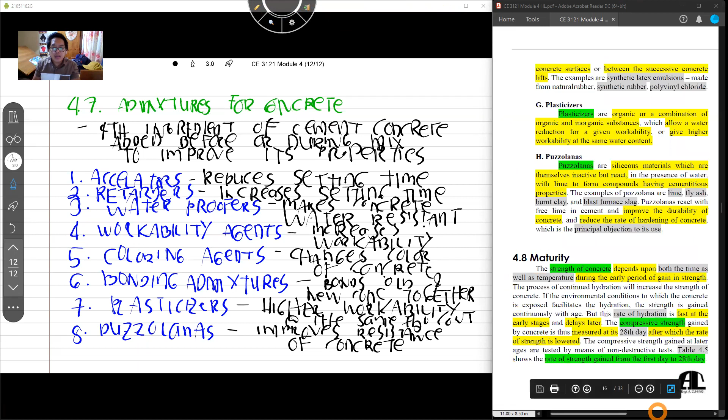So technically, our notation is percentage F prime C, because F prime C is our notation for the strength, compressive strength of concrete. So we have a formula, wherein A and B are defined - the values of A and B are constants. Then M sub N, this is the maturity of concrete at a certain percentage. Then we have the values of coefficients A and B in the formula for percentage of strength at maturity.

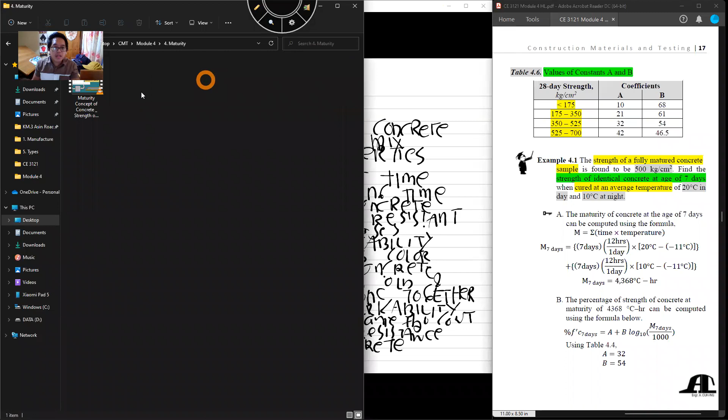So for you to further understand, we have a video discussion about that. Okay, so this is the maturity class. Let's watch it again before we summarize, and then we'll jump to the example.

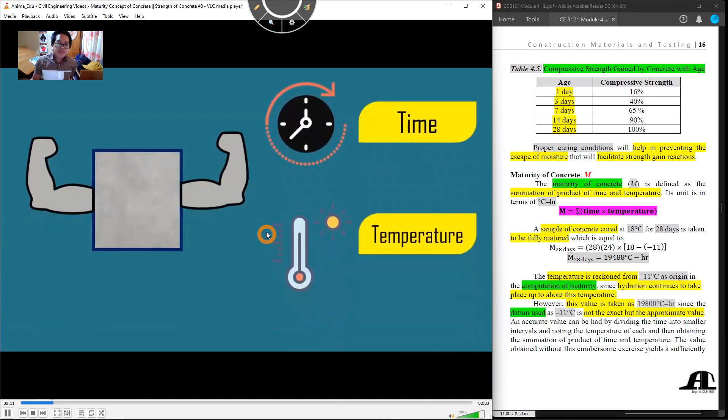Maturity concept of concrete. The strength of concrete depends upon both the time as well as temperature during the early period of gain in strength. The maturity of concrete is defined as the summation of the product of time and temperature. So again, class, that's our formula. Its units are degree Celsius hour or degree Celsius days.

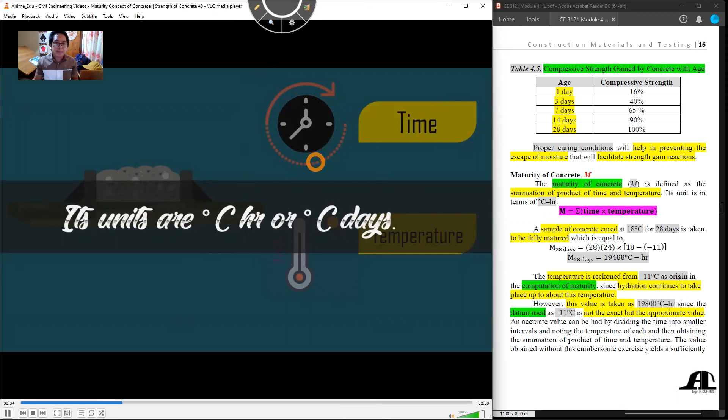Let's consider a sample of concrete cured at 18 degrees Celsius for 28 days whose maturity is calculated as this. So this is the explanation, class, of the sample computation.

In general, the hydration of concrete takes place even at the temperature of minus 11 degrees Celsius. So again, class, this is our reference in terms of temperature. That's our datum, our reference point. So always, class, whatever the given temperature is, we need to get the gap from negative 11 degrees Celsius.

That's why we subtract it, class. So instead of 0, our reference point, class, is negative 11 degrees Celsius. So from negative 11 degrees Celsius, class, to our respective temperature, that's our temperature here. Okay, thus it is taken as the origin in the computation of maturity.

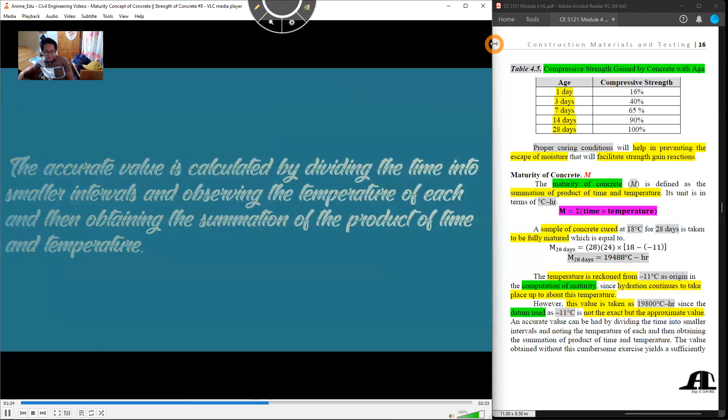The value is taken as approximately 19800 degrees Celsius hour. This is an approximate value. The accurate value is calculated by dividing the time into smaller intervals and observing the temperature of each, then obtaining the summation of the product of time and temperature. Besides, the value obtained with the help of the approximate value also yields a sufficiently accurate value and is widely accepted.

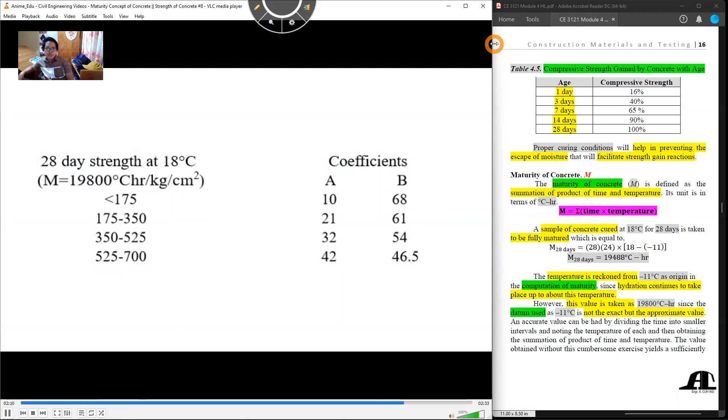The relationship between maturity and strength of concrete is shown. The maturity concept is very useful for estimating the strength of concrete at any other maturity as a percentage of the strength of concrete of known maturity by using the formula. The value of constants A and B are given by researcher Plowman, which is shown on the screen. With the help of these values, the strength of concrete at any maturity age can be calculated.

Thank you for watching. Stay tuned. The best is yet to come.

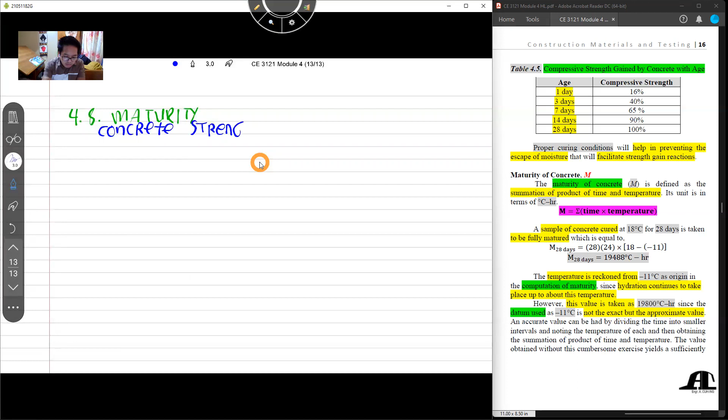Okay, so again, class, here we are at 4.8. Okay, so supposedly, class, this is the maturity. Okay, so first up, class, let's discuss the concrete strength gained with age. Okay, so we get an idea, class.

Okay, so yeah, so supposedly, class, for a certain age, let's do this in terms of days. Okay, at a certain age, class, we have the percentage of our compressive strength. Okay, so namely, class, we have 1 day, then 3, 7, 14, then 28.

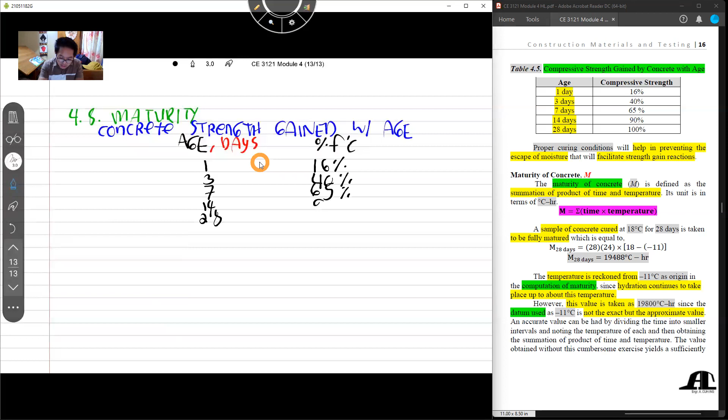Okay, so what's our percentage, class? For 1 day, class, we get 16% of compressive strength. For 3 days, class, we get 40%. Then 7 days, class, we get 65%. Okay, after 14 days, class, we're at about 90 already. Then, 28 days, it's already very mature. So we can say, class, safe to say, it has already reached 100%. Okay, so that's our gist, class, in terms of strength gain at maturity.

Okay, this time, class, we talk about maturity. So again, class, we have the formula for maturity. Okay, our notation, class, for maturity is M. So the formula, class, for maturity is M equals the summation, class, of time times the temperature. Okay, and our unit here, class, is again, for hour, class, degrees Celsius, hour.

Let's not use days, class, so we stay consistent. Okay, then our origin, class, in terms of temperature. Okay, so, yeah.

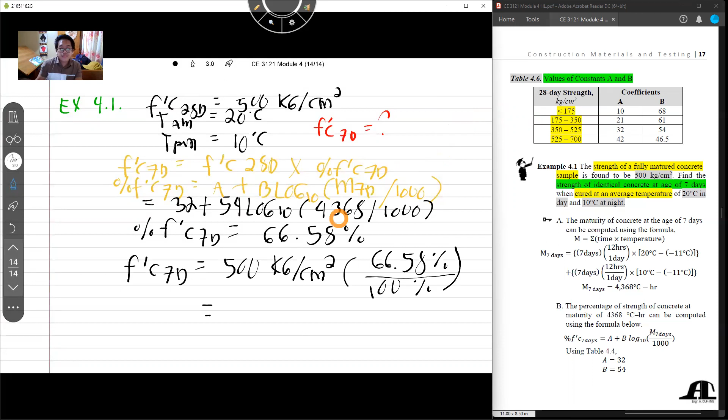Ang sagot na natin dito class, kung titignan nyo, sige i-calculate na rin natin. 500 times 0.6658 is equal to, meron tayong 332.9. Ang unit natin class, kilogram per centimeter squared. Ito na class yung strength ng concrete at 7 days.

Ayan, okay, ito na yung ating final answer, class. I-compare nyo, class. Tama yung sagot natin. Okay, ganun lang kadali, class.

Again, wag nyo lang kakalimutan, class, yung datum natin, yung origin natin in terms of temperature, dapat negative 11 degrees, as explained from the video, tsaka dun sa module natin. Okay, so tuloy-tuloy lang tayo class.

So moving on, meron tayong tinatawag, class, na design mix, mix design. Pinaka-formal definition natin, class, ng mix design is the process of selecting suitable ingredients of concrete and determining the relative quantities with the objective of producing an economically as possible concrete of certain minimum properties.

Okay, so ano yung properties? Workability, strength, and durability. Bale, in simple words class, ang consideration natin in the design mix is yung cost tsaka yung minimum required properties natin.

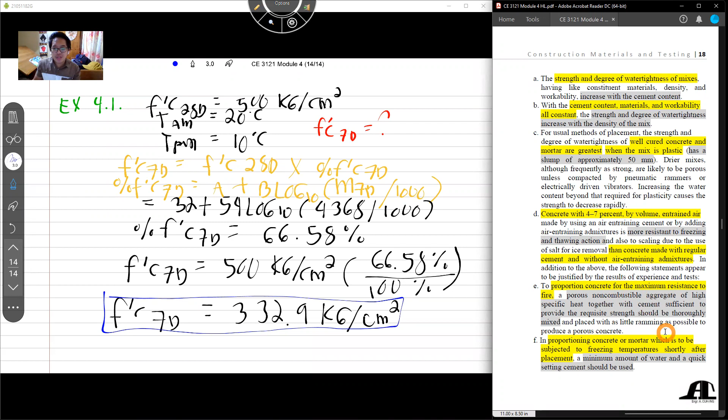Minimum amount of water and a quick setting cement should be used. Lastly, concrete for road construction should be made from a carefully graded, hard, tough aggregate bound together with a small proportion of rich mortar.

Let's simplify this. Read it on your own. So technically, we talked about mix design 4.9.

Specifically, mix design. In terms of mix design, this is where you create your own mix to attain certain properties of the concrete. Let's define it: this is the process of selecting suitable ingredients of concrete with certain properties.

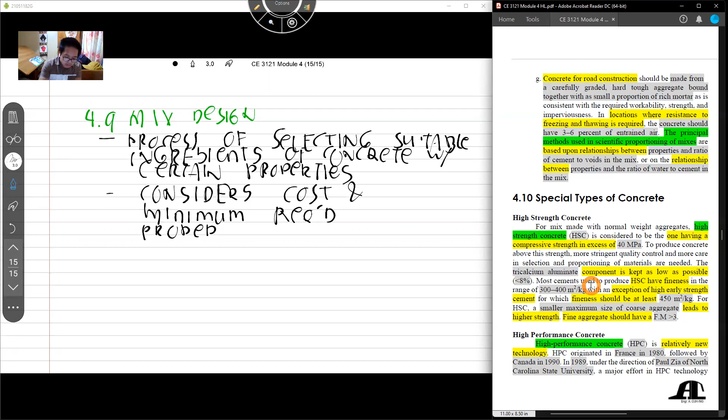So again, we have to consider the cost as our main consideration in selecting the ingredients. Then the minimum required properties of the concrete.

Let's continue. So we have certain special types of concrete, namely: high-strength concrete, high-performance concrete, and what we call self-compacting concrete.

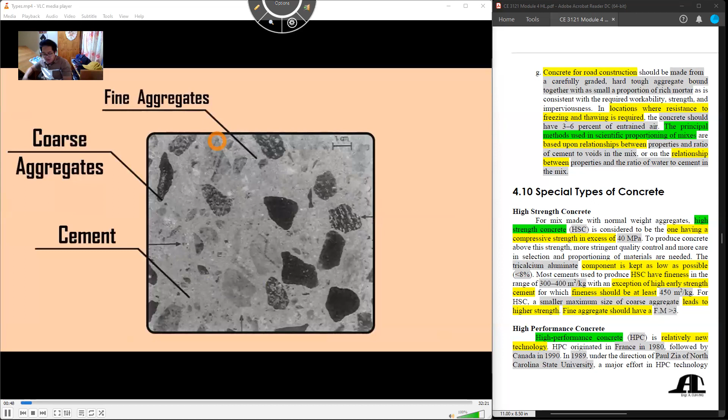Concrete is a composite material composed of binder, that is cement or lime, fine aggregates, that is sand, and coarse aggregates mixed with water which hardens with time. The fine aggregates fill the voids of coarse aggregates, and the voids of the fine aggregates are filled with the binder. This binder reacts with water and binds the aggregate, forming a complex matrix. This composite form is called concrete. To know how to manufacture concrete, watch the videos in this playlist. Link is available in the description.

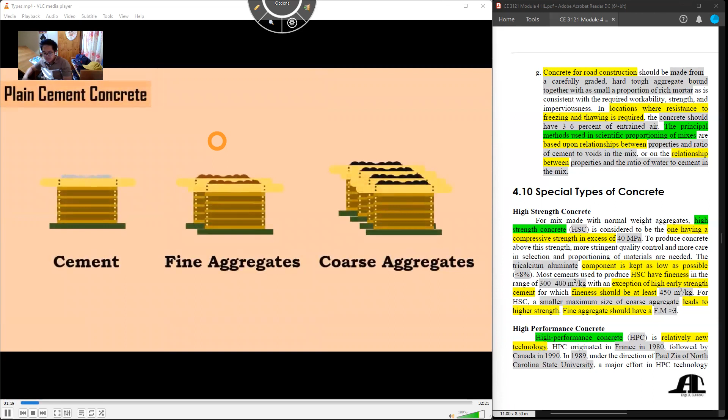There are many types of concrete available, which we are going to see in our upcoming videos. First, let's start with plain cement concrete. This is the simplest form of concrete, made only by mixing basic ingredients. These types of concrete are mainly used in the construction of pavements and buildings, especially in areas where there is a requirement for low tensile strength.

It is also used as bed concrete below the footings and walls, and sill concrete below the window and ventilator. We will see the other types of concrete one by one in upcoming videos.

Reinforced cement concrete: the hardened concrete is generally high in compressive strength, but its tensile strength is very low, generally approximately 1/10 of its compressive strength. We can say concrete is strong in compression and weak in tension. To strengthen the concrete section in tension, reinforcement steel is embedded into the concrete. This composite section is called reinforced cement concrete. The reinforcing steel also imparts ductility to the concrete, which is primarily brittle.

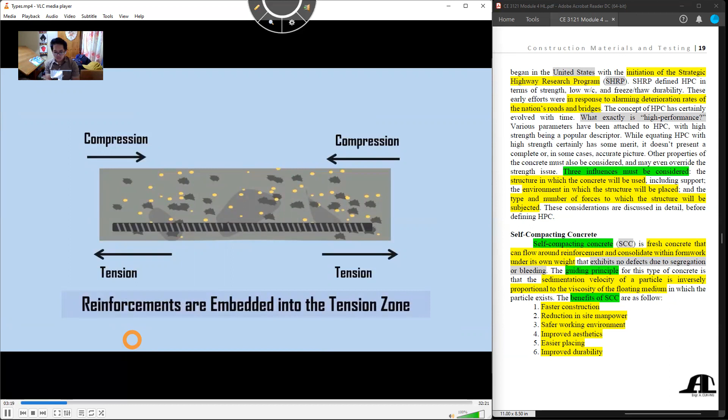The reinforcements are embedded into the tension zone of the section to counteract the tension force acting in the section. Most of the modern-day buildings are constructed using this type of concrete. In case of compression members, reinforcing steel also acts as a supplement in bearing compressive forces. In recent times, polymers are also widely used for making reinforced concrete.

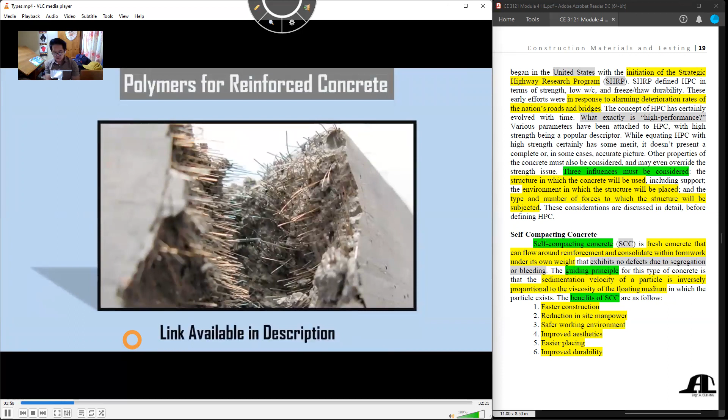The usage of reinforcements, such as size and number of reinforcement steel, should be designed based on various factors, and it should also be confined to a specific code of practice. Improper size and number of reinforcements may result in failure of the structures.

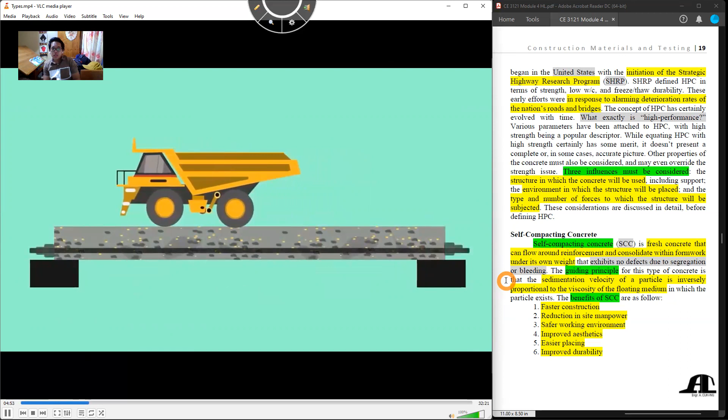In pre-stressing, the rods or tendons are stretched along the axis and cement is poured. Later, when the tendons are released, the compression generated at the bottom tries to counterbalance the compression due to loading at the top part of the beam.

The principle behind pre-stressed concrete is that compressive stresses are induced by the high-strength steel tendons in a concrete member before loads are applied. This will balance the stresses imposed in the member during service.

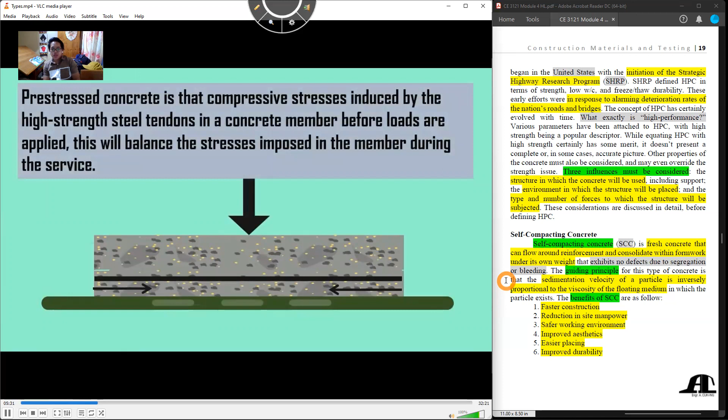Pre-stressed concrete can be used for the construction of roofs, floors, walls, and bridges with longer unsupported spans. Pre-stressing is generally done by two methods: pre-tensioned concrete and post-tensioned concrete.

Post-tensioned concrete. In post-tensioned concrete, the tendons are tensioned after the concrete is poured. Initially, the concrete is cast around the sheathing. The ducts are formed in concrete in which tendons are placed. After the concrete is hardened, the tendons are tensioned by hydraulic jacks and anchored.

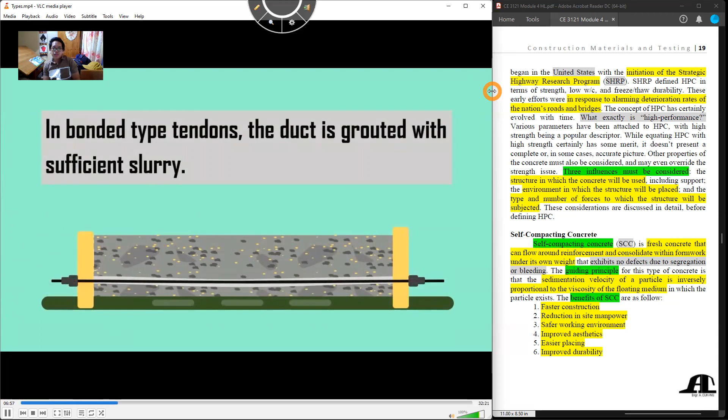In case of bonded type tendons, the duct is grouted with sufficient slurry. In the unbonded type of tendons, grouting is not necessary. We will learn about this later.

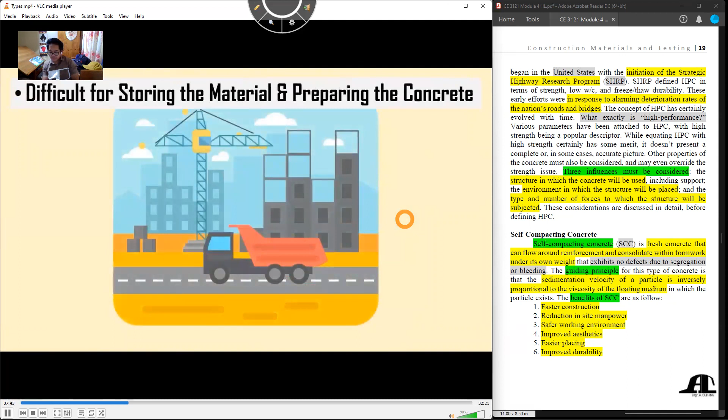In certain places where there is limited availability of space in the construction site, it is difficult for storing the material and preparing the concrete. In such cases, concrete is cast at factories and brought to the construction site and assembled together.

In general, precast concrete is a product produced by casting concrete in a reusable mold or form, which is then cured in a controlled environment, and then transported to the construction site and assembled in the required place.

These precast concrete members are cast either as plain concrete, reinforced concrete, or pre-stressed concrete. This is a far faster, safer and more affordable way of construction than standard concrete, which is poured directly at the construction site. Precast concrete allows efficient, economical construction in all weather conditions.

Precast concrete is being used in a wide range of fields like building units, landscaping products, sanitary and stormwater products, paving units, traffic barriers, and so on. Most of the bridge components are prepared using the precast technique. Other common examples of precast concrete are concrete blocks, steps of the staircase, precast walls and poles, concrete lintels, railway sleepers, and many other elements.

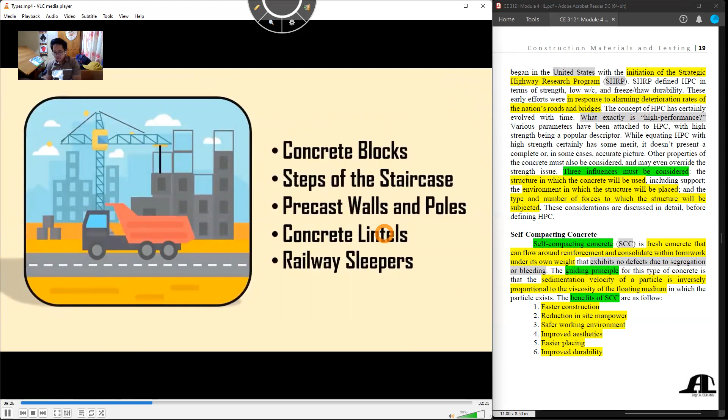The main disadvantage is it requires high-skilled laborers for installation of precast products. Proper connections must be made between each precast product, or else load distribution may not be uniform and sections may even fail.

Lightweight concrete is commonly used in the construction industry where it is important to reduce the density of the concrete. Ordinary concrete is quite heavy and its density is about 2,300 kg per cubic meter, whereas lightweight concrete has a density less than 1,840 kg per cubic meter.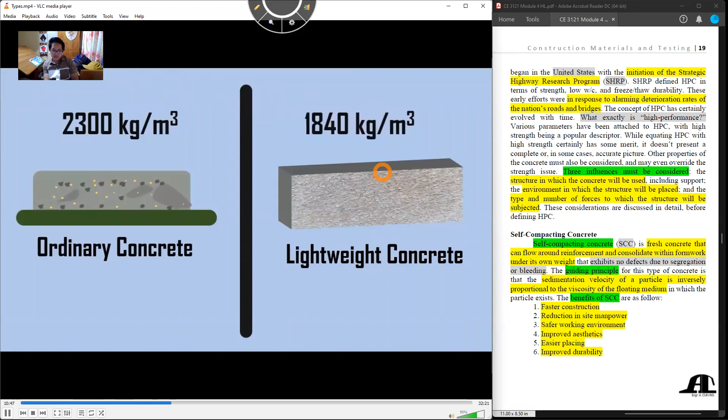Lightweight concrete is made by replacing some or all of the normal weight aggregate with lightweight aggregate. Often the coarse fraction is replaced with lightweight aggregate and the fines are normal weight sand. This lightweight concrete not only results in reducing dead weights on the structure but also has better insulation against heat and sound.

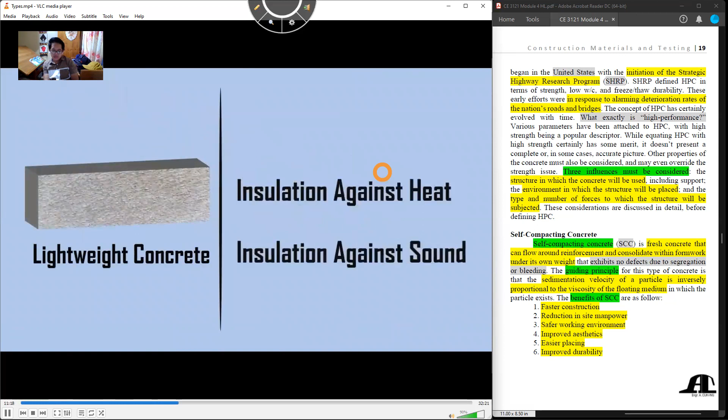However, the strength of the concrete is reduced. The most common uses for lightweight concrete are floor, roof and bridge decks. Others include pavement systems, masonry blocks and offshore oil structures. Lightweight concretes can either be lightweight aggregate concrete, foamed concrete, or autoclaved aerated concrete.

Lightweight aggregate concrete. This type of concrete can be produced by using a porous lightweight aggregate of low apparent specific gravity. Examples of lightweight aggregates are pumice, perlite, and scoria.

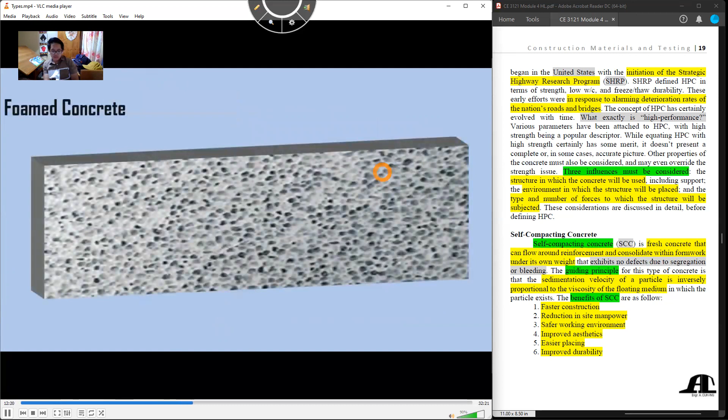Foamed concrete. This type of concrete is formed by introducing large voids within the concrete. Foamed concrete is a highly workable, low-density material which can incorporate up to 50% entrained air.

Lightweight structural concrete. Lightweight concretes can also be used for structural applications, with strengths equivalent to normal weight concrete. These are generally made with expanded shale, clay, slates, slag, and fly ash. The minimum compressive strength would be 17.24 Newton per millimeter square.

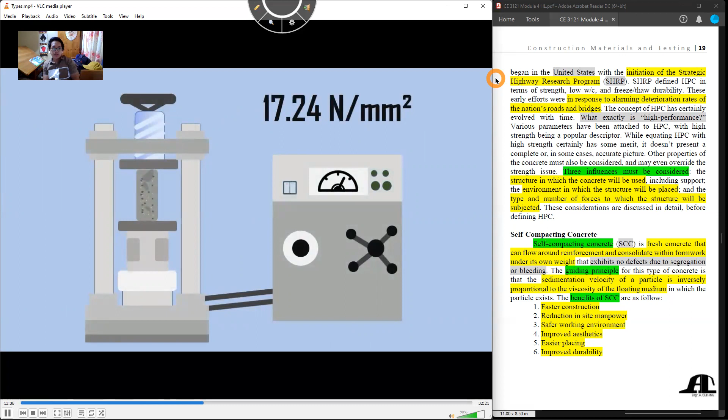Ready mix. So the next type of concrete class is ready-mix concrete, which we discussed earlier. Okay? Concrete.

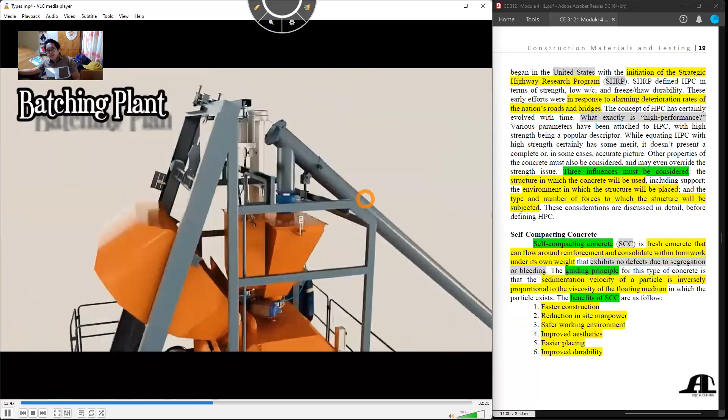Ready-mix concrete, that is RMC, is a type of concrete which is manufactured in factories, called batching plants, based on the engineered mix design. The mixed concrete is brought to the construction site by truck mixers or transit mixers.

The transit mixer is of two types. One type is the concrete made dry at the batching plant, loaded into agitated truck mixers, and water added during transportation.

In the other type, mixed wet concrete is made at the batching plant, discharged into the agitated truck mixers, and transported to the site. The drum in the truck is made to rotate till the concrete is placed, in order to keep the concrete in a plastic state.

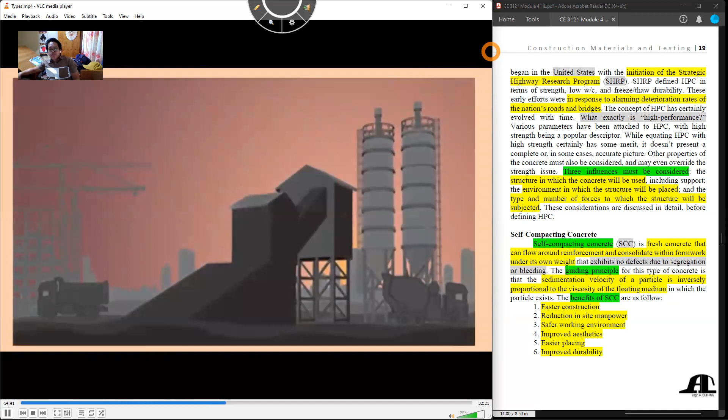We will see about the manufacturing process involved in ready-mix concrete later.

It allows speedy construction through programmed delivery at site, mechanized operation with acceptable economy. Usage of RMC reduces the labor cost and site supervising cost.

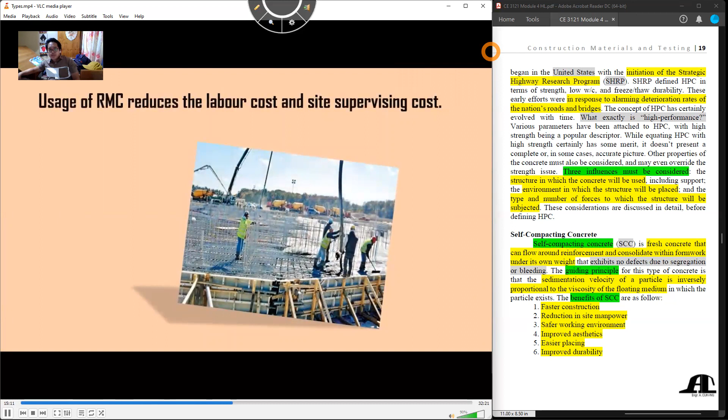The consistency in the quality of concrete is maintained through accurate and computerized control of cement, aggregates, and water as per mix designs. Usage of RMC also reduces the wastage of raw materials during storage.

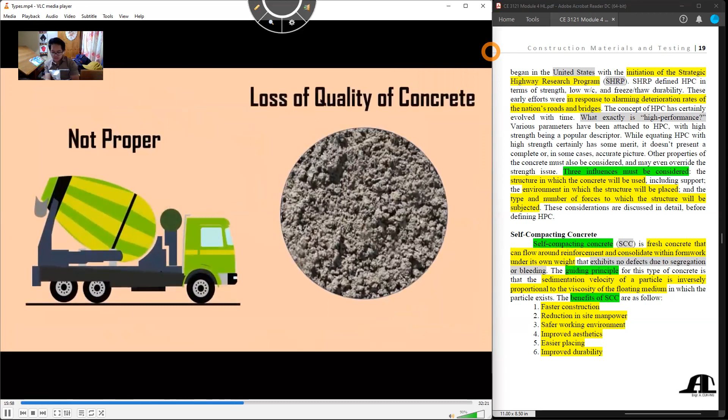The main disadvantages of RMC are that it requires special formwork arrangements since the movement of concrete through pumps can cause vibrations. And if the transit mixer is not in proper condition, there is a chance of loss of quality of concrete. In recent times, for large construction works, a small batching plant is set near the construction site where transit mixers may not be required.

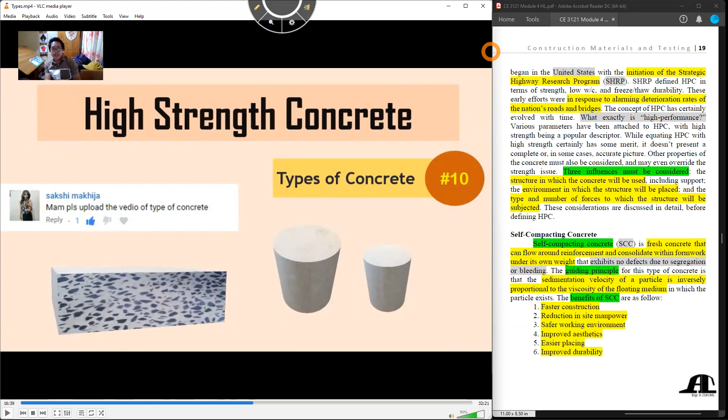High strength concrete. So now we move on to high strength concrete. Okay? So continuing the video.

High strength concrete is a type of concrete which has compressive strength of 40 MPa or greater. The compressive strength is generally measured on 150 by 300 mm or 100 by 200 mm test cylinders, generally at specific ages depending upon the application.

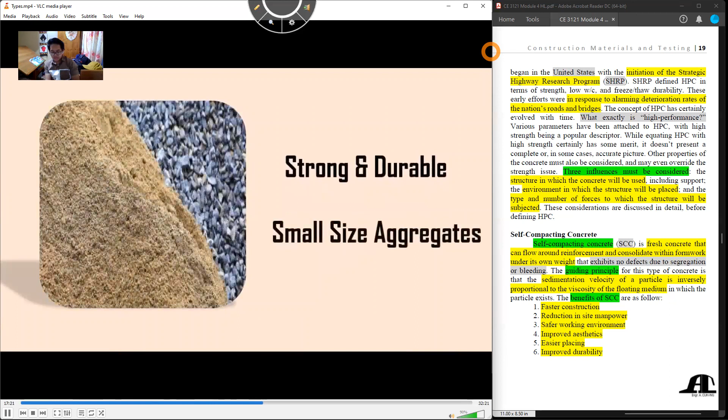Some of the basic concepts in preparing high strength concrete are: aggregates used must be strong and durable. Generally, small size aggregates are used for making high strength concrete. High strength concrete generally uses a low water cement ratio, which ranges from 0.23 to 0.35.

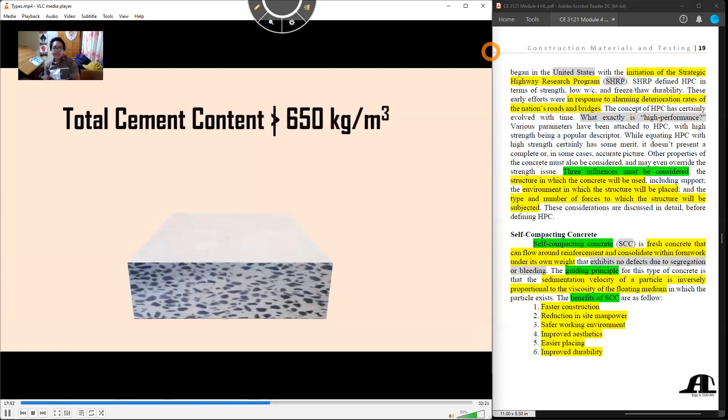Thus, superplasticizers are added to obtain the desired workability. The total cement content for this type of concrete should not be more than 650 kilograms per meter cube, as high cement content results in cracking due to hydration.

Sometimes, to obtain the desired strength, cement is mixed with supplementary materials like fly ash, ground granulated blast furnace slag, natural pozzolanic materials, etc. In addition, the components of the design mix like mix proportioning, the shape of aggregates, supplementary cementitious materials, and superplasticizers should be given special care while designing.

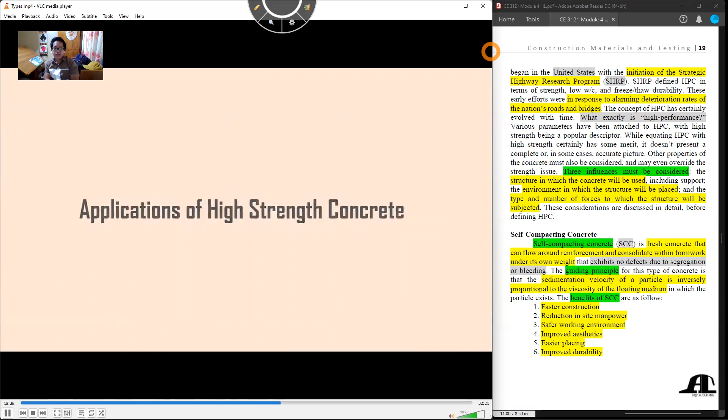The most common applications are to put the concrete into service at a much earlier age, for example opening the pavement at 3 days; to build high-rise buildings by reducing column sizes and increasing available space; and to build the superstructures of long-span bridges and enhance the durability of bridge decks.

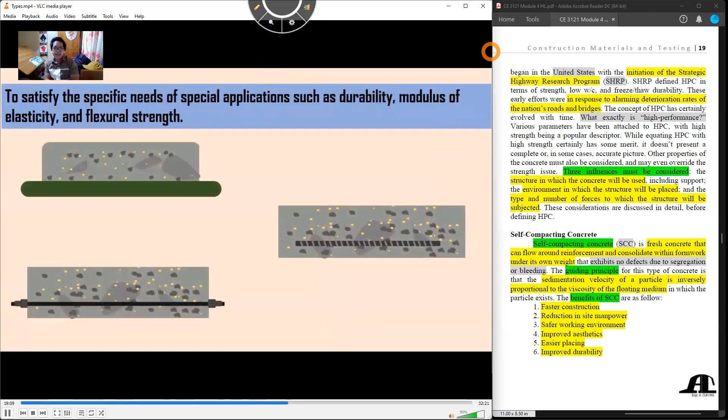To satisfy the specific needs of special applications such as durability, modulus of elasticity, and flexural strength. Some areas of use are dams, grandstand roofs, marine foundations, parking garages, and heavy-duty industrial floors.

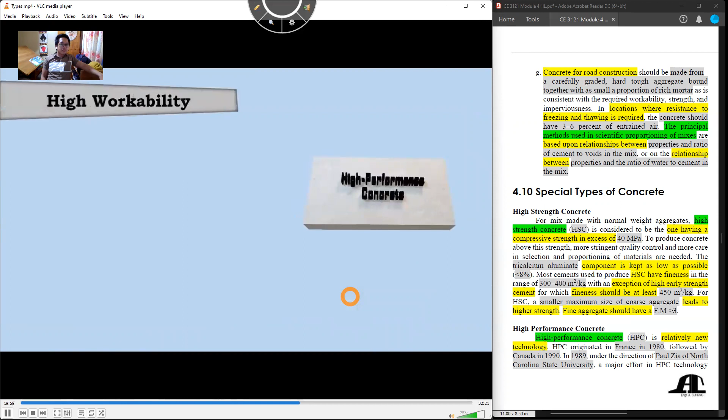High performance concrete is a type of concrete which possesses high workability, high strength, high modulus of elasticity, high density, high dimensional stability, low permeability, and resistance to chemical attack.

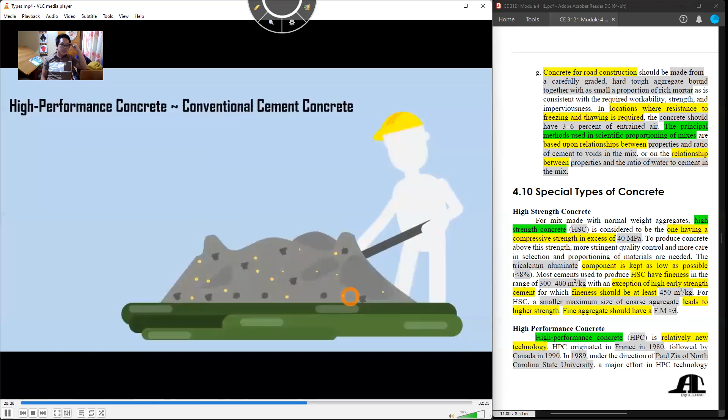High performance concrete is also a high strength concrete, but it has a few more attributes as mentioned already. It is made with materials similar to conventional cement concrete, but special care is taken for selection of materials and mix design. In addition, admixtures are added based on the purpose of the concrete to be used.

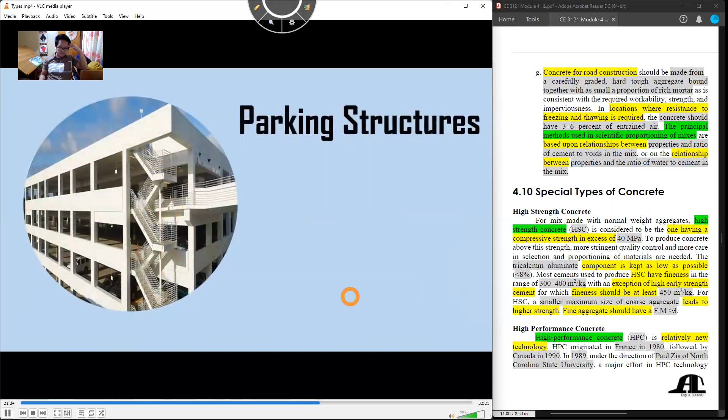High performance concrete still requires good construction practice and good curing to deliver high performance. The initial cost of this type of concrete is higher than normal concrete. However, maintenance cost is reduced comparatively, as high performance concrete suffers less damage.

So next up, class, that's it. This is the third one in our module, the self-consolidated or self-compacting concrete.

Self-consolidated concrete is also known as self-compacting concrete. It is a highly flowable, non-segregating concrete that spreads and fills in the formwork without any mechanical vibration. The importance of self-compacting concrete is that it maintains all concrete's durability and characteristics, meeting expected performance requirements.

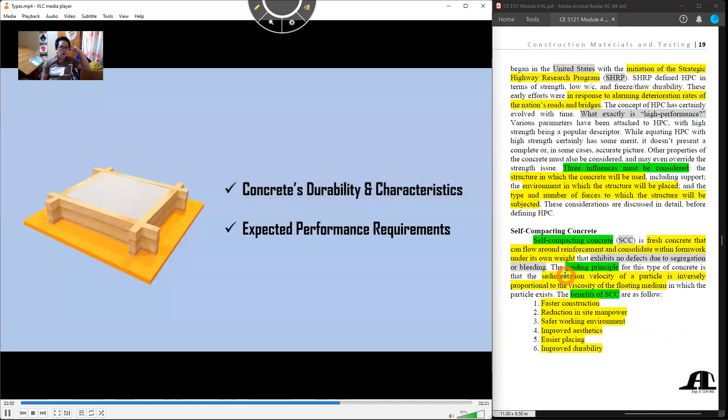The spread of self-compacting concrete in a flow table test ranges from 455 mm to 810 mm. The two main important properties of self-compacting concrete are flowability and stability. Flowability is attained by using high-range water-reducing admixtures, not by adding extra water.

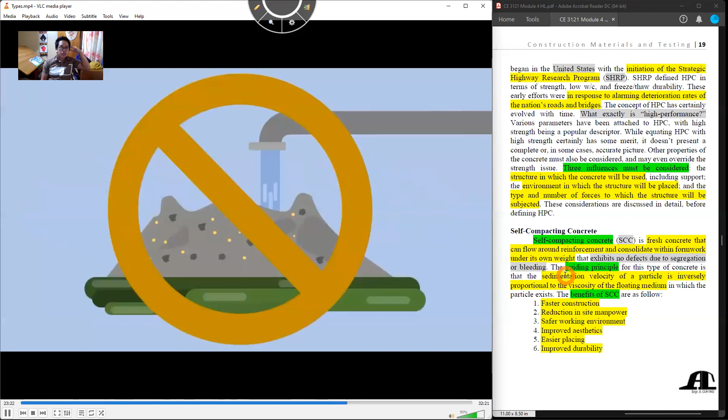Stability towards segregation of the plastic concrete is attained by increasing the fine aggregate or by using admixtures which modify the viscosity of the mixture. Self-compacting concrete with a similar water-cement ratio will usually have slightly higher strength compared with traditional vibrated concrete. This is due to the lack of vibration providing an improved interface between the aggregate and hardened paste.

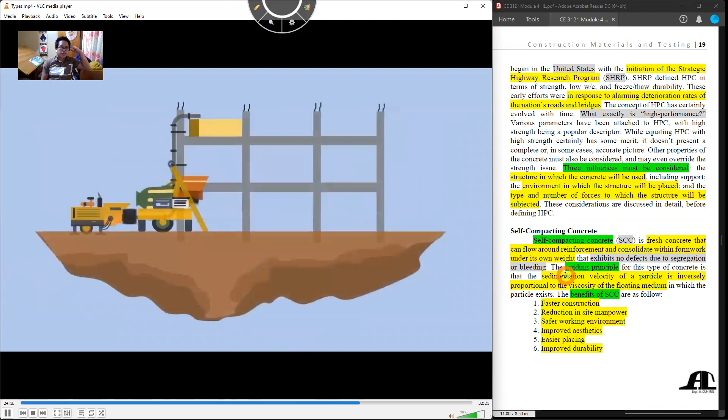Self-compacting concrete is mainly used in areas of congested reinforcement. It is also used in bridges and precast sections. This type of concrete can be easily pumped to the specified point. It is ideal to be used in drill shaft columns, earth-retaining structures, areas with high concentration of rebar, and manufacture of concrete pipes.

Some of the special benefits of this type of concrete are: minimizes voids on highly reinforced areas, reduces skilled labor, easily flows into complex forms, and has excellent bond to the reinforcing steel, and so on.

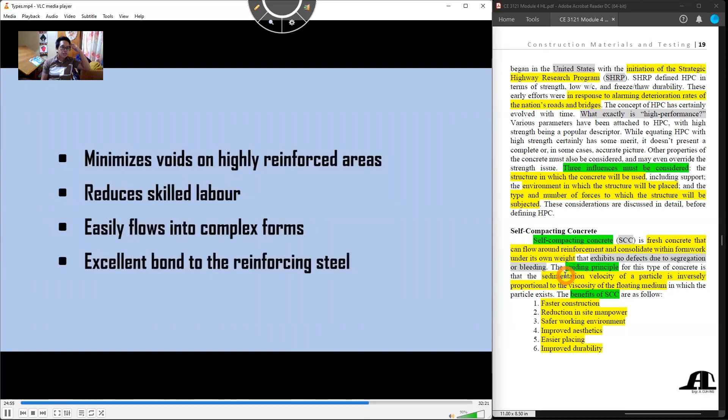Shotcrete. So class, the next step is shotcrete or sprayed concrete. This is exciting, class.

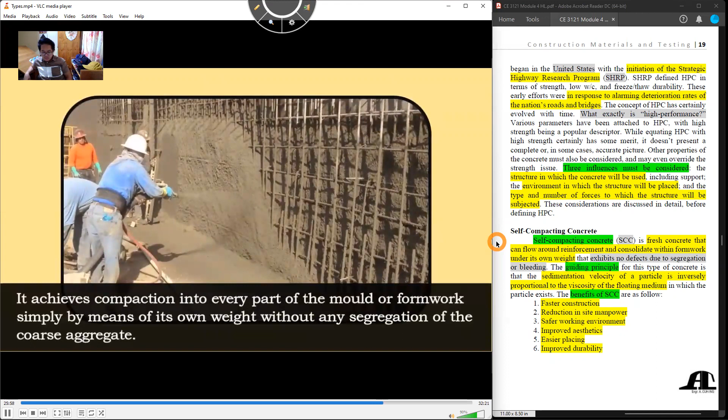This type of concrete has no special properties as compared to normal concrete placed under similar conditions. They are generally applied in two ways, namely the dry process and the wet process.

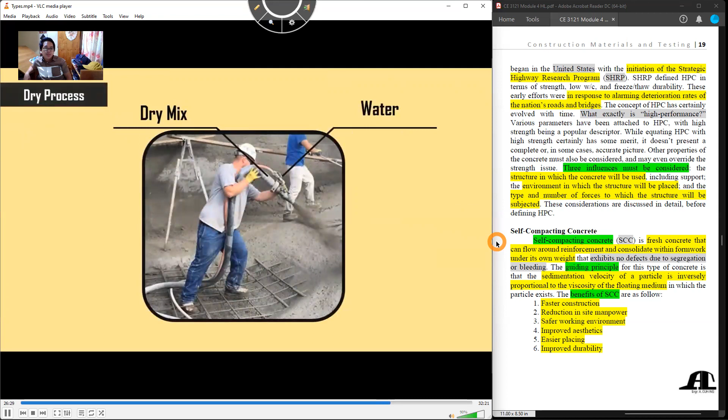In the dry process, a predetermined dry mix of cement and aggregate is propelled through a spraying nozzle, where a finely atomized spray of water is added to the stream of materials before being sprayed. In the wet process, the batched wet concrete is pumped through a hose or pipe to a discharge nozzle, where high-pressure air propels the concrete into the required position. There are many applications and uses for sprayed concrete.

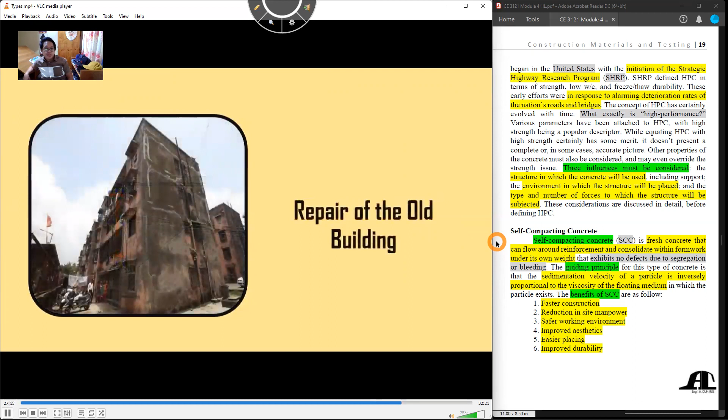Some common places where shotcrete is used are thin and lightly reinforced sections like curtain walls, shell or folded roofs, the lining of tunnels and canals, stabilizing rock slopes, encasing steel, and repair of old, disintegrated, or leaking linings. The main disadvantages of shotcrete are its high cost and that shotcrete lining is less durable than ordinary concrete lining of the same thickness.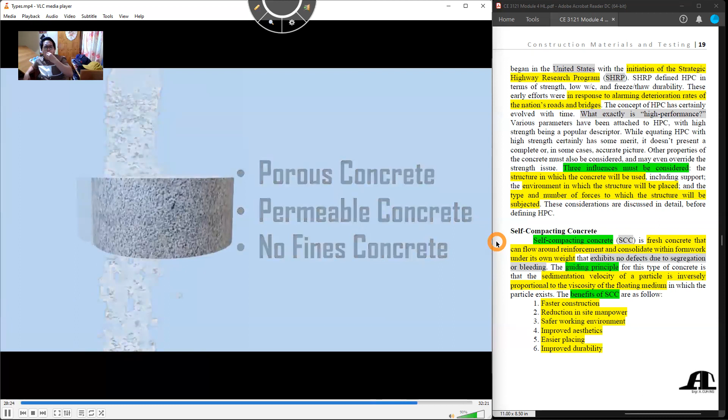Pervious concrete is a special type of concrete which has high porosity to allow water to pass through it, thereby reducing runoff from a site and recharging groundwater levels. It is also called porous concrete, permeable concrete, and no-fines concrete. The high porosity is attained by a highly interconnected void content. Pervious concrete consists of cement, coarse aggregate, and water with little to no fine aggregates.

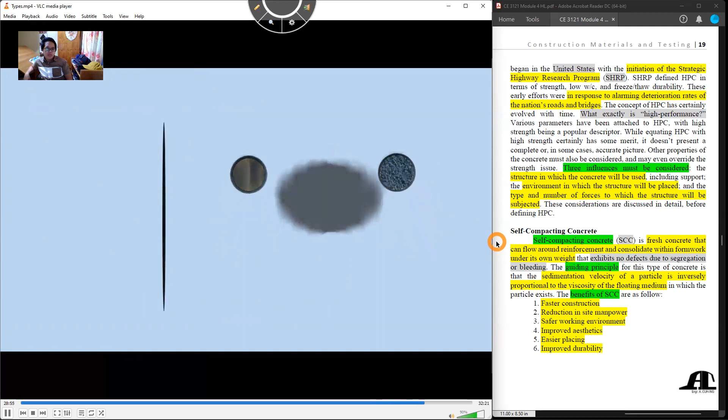The high porosity reduces strength compared to conventional concrete mixtures; however, strength can be increased by adding the required fine aggregates. The mixture generally prefers a water-cement ratio of 0.28 to 0.40 with a void content of 15 to 25%. The average flow rate for water through pervious concrete is typically around 0.34 centimeters per second. Pervious concrete is traditionally used in parking areas, areas with light traffic, pedestrian walkways, and greenhouse construction. It is an important technique for sustainable construction, and is also widely used for constructing pavements that preserve stormwater runoff.

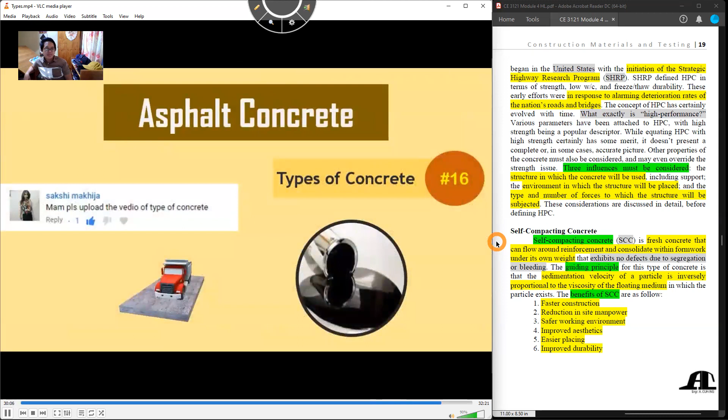Asphalt concrete is a type of concrete in which the cement is replaced by asphalt, a dark, sticky substance derived from crude oil. It is commonly used in the construction of surface roads, parking lots, airport roads, as well as the core of embankment dams.

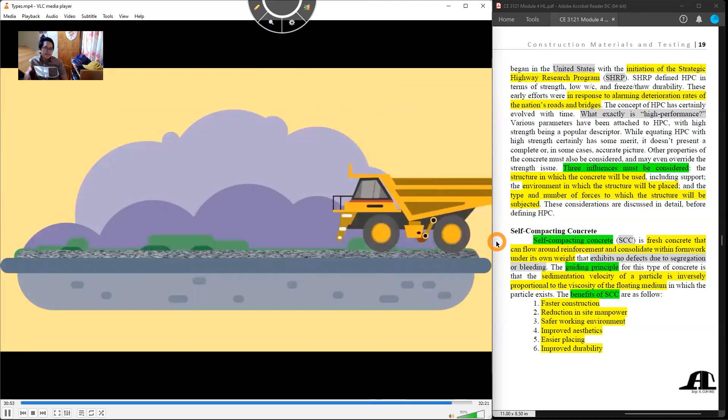This concrete is manufactured in different ways. The most commonly used method is pouring hot asphalt over a bed of aggregates and pressing it with a steam roller. Once the asphalt cools to the surrounding air temperature, it becomes strong enough to withstand automobile traffic. Even though asphalt is extremely hard and durable, it offers enough flexibility to accommodate imperfections in underlying surfaces. In recent times, asphalt concrete paving machines are being adopted, which deliver the mixed asphalt concrete.

Advantages of asphalt concrete pavements are: it is economical compared to cement concrete, and it takes less time to build an asphalt road than a cement concrete road. Asphalt is a recyclable material, and can be used again and again by melting it. Repairing asphalt road is easily possible; damaged areas are filled with fresh asphalt, and a steamroller goes over the entire surface to yield a smooth, even pavement.